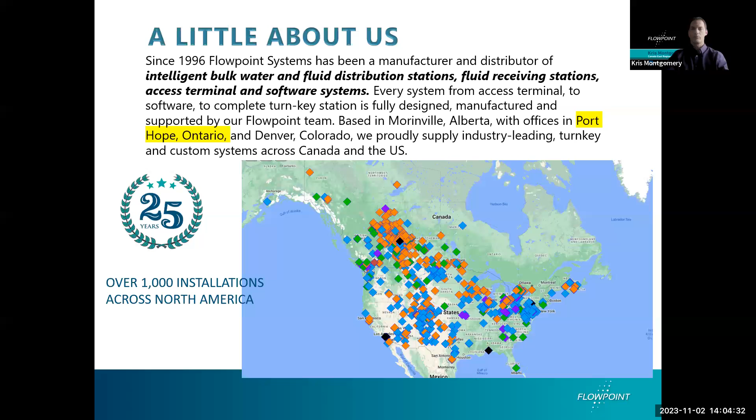So if you ever wanted to go out to a site to see a specific installation or a specific design site, there's lots in Ontario to choose from. Luckily, one of our clients has provided us a few shots. They actually do some presentations with us.

Here is their experience. First of all, why is anybody doing this still? Why are we utilizing hydrants? Why are we utilizing infrastructure that's not designed for the purpose that we're using it for? All we're ending up doing is causing damage to it when there's an easy solution to get exactly what you want and get it to your site.

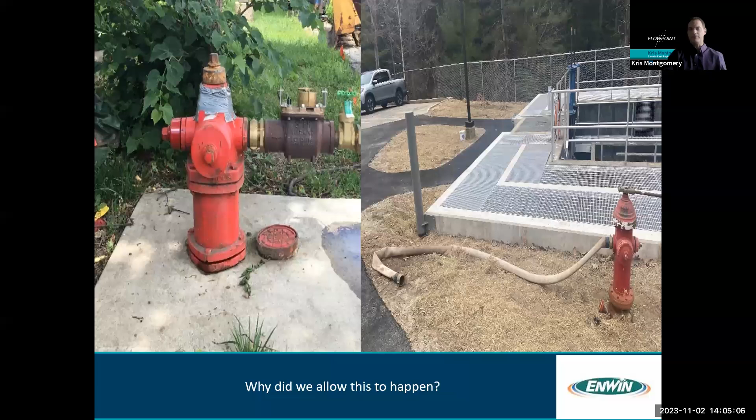So here's what they did. They switched over from that to a bulk water station that was specifically designed for their sites. They're in the process of getting three more in the next two years.

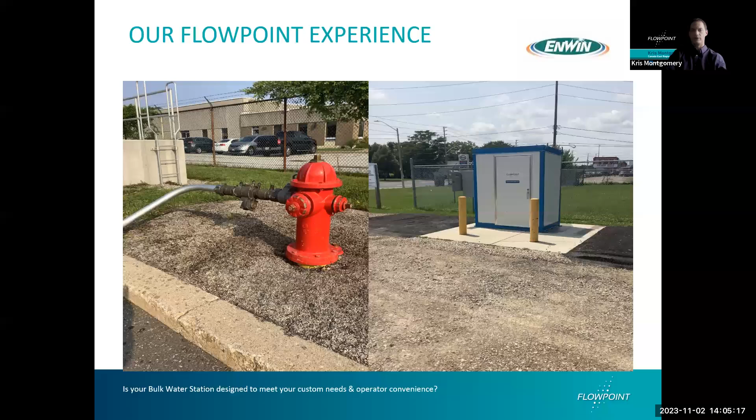Here was a big point they wanted to push out there to let people know about their experience, which was when they first planned an ETO type project, they had to use some estimates, some guessing, a lot of input from us, and their values came out to them thinking they would get a return on their investment in 4.5 years. They ended up getting that same return on investment, but in 13 months. So just to show you, there's a cost savings advantage as well when you're looking at an ETO approach in many situations.

So what is our process? The ETO process can be addressed with numerous different types of projects.

If you're looking for a water treatment process, you're looking for a package system. If you're looking for an addition to your existing system and don't want to build another brick and mortar building, or you need to do site prep like bringing in infrastructure to accommodate a building, you can save time by having the building built off site while all that site prep is being done. Then when the site prep is completed, the station is already there, ready to go. It just gets put on top and hooked up.

So you can be doing that for water treatment, for booster, for lift stations, even chemical feed systems. And what you'll find a lot of currently in Ontario, all the way from Carleton Place down to Windsor, are our bulk water stations and our septic receiving stations. I'm going to go into each one of those a little more as I continue on.

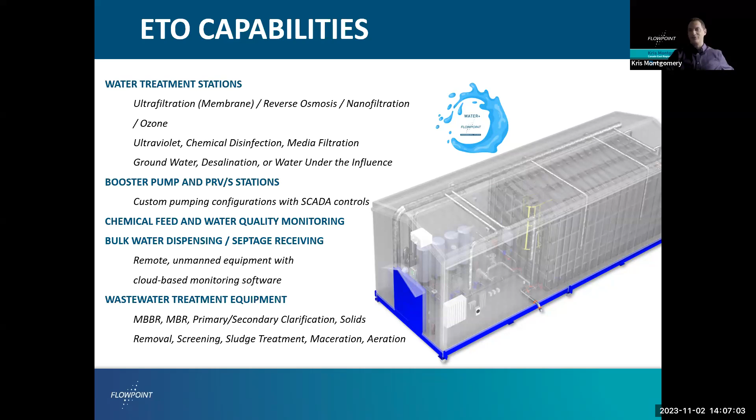So our process, we customize. That's the beauty. There's none of this 'we have 5 sitting in a storage site somewhere' approach, where when you call and say you'd like our package plant or our bulk water system, we say we'll ship it out tomorrow because that's all we provide. No, it's all the way from design.

It even starts with first learning about your site, and then working towards putting together a concept design, all the way through to shop drawings, to actual supply to site, to afterwards. So you get what you want, and you don't have to be limited to only what we can provide.

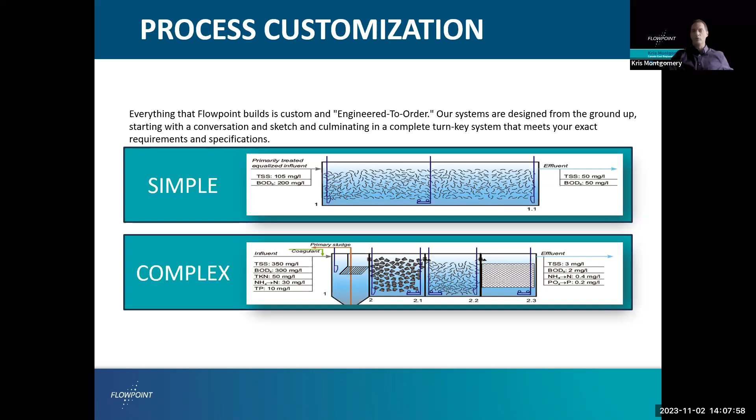So again, here's the process: discovery, asking questions. Then we go into the concept stage, and finally put together a package once we've clarified everything you want, everything you don't want, footprint, and all the different changes that might happen to a site to accommodate what you need and want. We build it, we ship it to you, and then of course it's installed on site.

And then Flowpoint offers support, service, and the software. We do it all. It's all being done by our company, not third party. So again, you have that one point of accountability for everything.

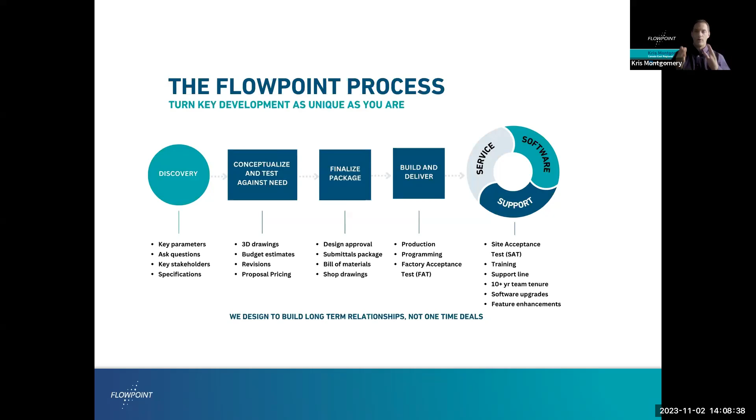So here's our first question, and remember there is a prize for a person at the end. Question 1: what benefit will you get from an ETO system that you may not get from a cookie cutter system? First, get exactly the equipment you want, get exactly the functionality you want, and get it sized for the footprint that you have. Number 2, having one warranty that covers everything, and the ability to have a company that provides you up to a 5-year warranty. Have only one point of accountability for your design, the manufacturing, the software, the service, everything done by one company. Or is the right answer all of the above?

Okay, well, most people got the answer of all the above. Not to say the other ones aren't correct, because those answers are correct as well, but the most correct answer for this is number 4. You get all of these things in an ETO system that you don't typically see in a cookie cutter system. In all my years in the industry, I can't remember someone offering me a 5-year warranty.

So here's what you'd see if you went to our website. You would see that we provide this same type of approach to all of our systems - bulk water, water treatment, booster, septage, custom systems. If you have something you want built and you think it'd be best to get it pre-built, pre-factory tested, shipped to your site, ready to go, give us a call. That's the whole beauty of us doing our in-house engineering, our in-house designing. We do a lot of one-off custom jobs as well.

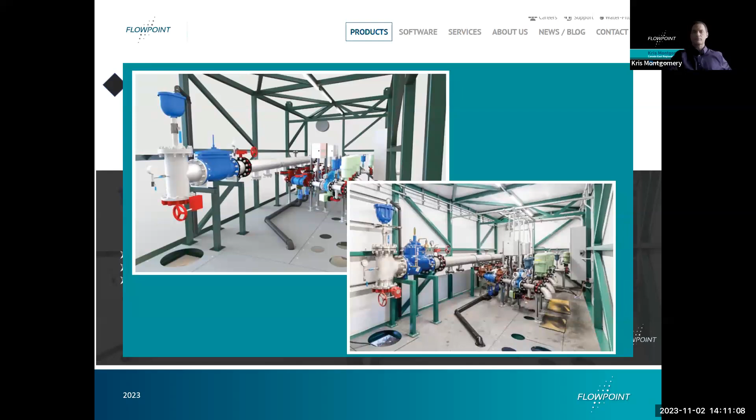So as we mentioned, there's the design work, design drawings, shop drawings, and these all get tailored and custom. This is an example of a dual station that's currently being used by the Durham region.

So where do we start? First off, we have our truck panels. These are our control systems, all built in our own factory, with software provided by us. It can be added and retrofitted.

That's one way we do work - we can retrofit to an existing building. It gives you that upgrade, and isn't that what we're all talking about? How do I take equipment I don't have and need, or take an older system and give it additional functionality through retrofit? That's where it starts. We can start simply with upgrading your controls and software, and then maybe in phase 2, down the road, we look at helping update the station itself.

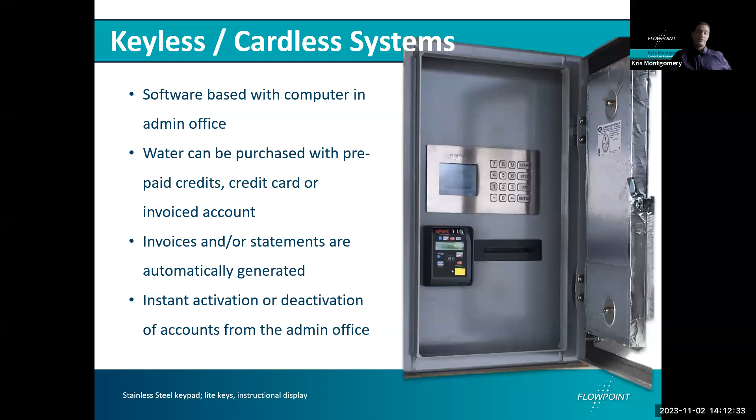Our panels have many options themselves. Again, engineered - keyless, cardless, no fobs, no keys. However, they can be provided if that's the preferred system. We can provide point of sale devices, printers. You can even still put money in if you want a money acceptor. I know a lot of our clients are going away from money and printers because everything's digital with our software.

So with that, as I mentioned, comes software. That helps you reduce administration costs. That's another way to engineer. The software is changeable - it's not 'here's our software, you've got to use it.' You might be looking at software being engineered as well.

We would like it to look like this. We would like this kind of control. We would like e-commerce, we would like prepaid versus having to chase people for billing. All of that can be configured. What do you want the screens at your station to say when a hauler first opens the door? All of that can be tailor-made. So again, from each step down - tailored, tailored, tailored.

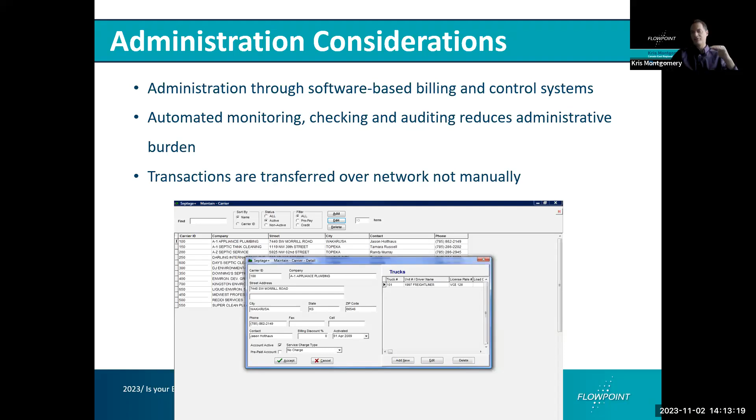Here's an example of what one of those screens could look like. Your reporting, your invoicing - again, customizable.

Design - interior will go through different designs. What infrastructure are you connecting to? And then, of course, this location might not be where you want it 5 years from now.

This might be near a new subdivision that's being built, so you want the haulers not traveling all through town. You want them getting water right there and being able to meter it, track it, and invoice for it or get paid for it. But 3 years from now, you can unhilty this, lift it up, and put it on a slab at a different site, if desired.

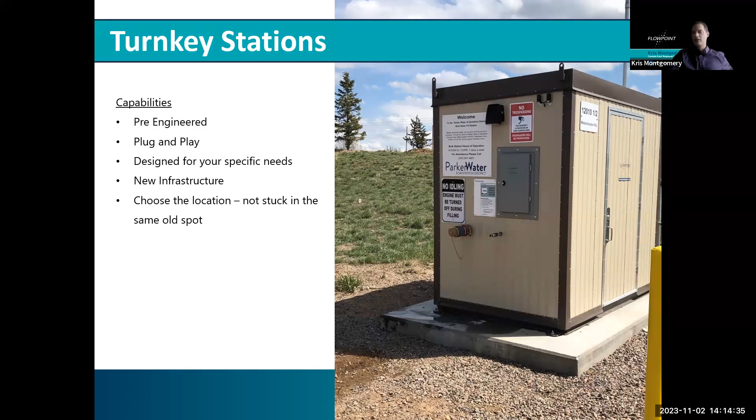So you can start with an honor system if that's what you have right now, and upgrade to this - that's what we're talking about. Getting something that operators can walk straight into. It's heated, it's got lighting inside. So when they're operating at 2 o'clock in the morning in the middle of February, they're not having to stand out in the wind, the cold, and the wet. They get to go in here and do their operations, do their maintenance.

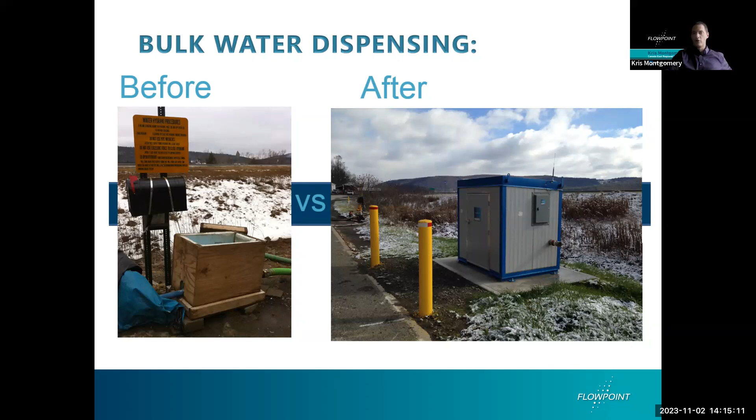And then they can lock it up when they leave, right? It's also got all those safety features, exterior lights, the whole bit.

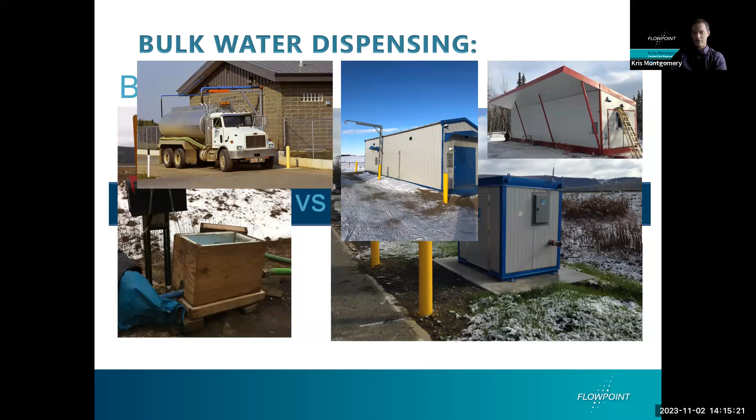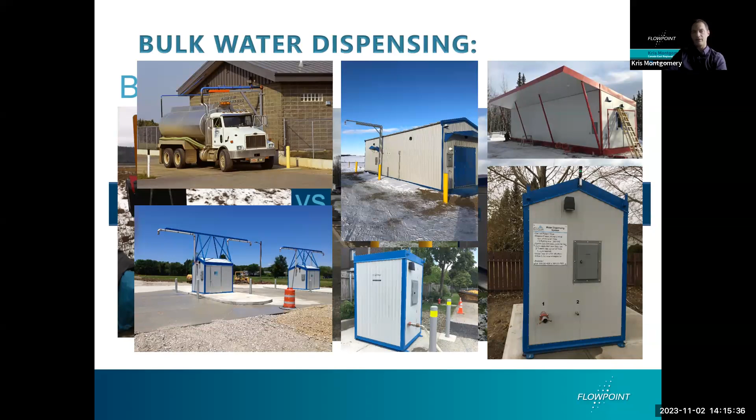Here's a few slides that just show you different customized systems. This is actually a station up in the Northwest Territories, so they're designed for our climate as well. We build in Canada, we design for Canada. Different sizes, different peaks of roof - that way, if you want more headspace or an overhead fill like this, there's lots of different options, lots of different designs.

We do have some standard components that we recommend - 3-inch stainless steel or 2-inch stainless steel, depending on the size of the system. We can do bigger pipe than that as well, with certain meters, but they all come with backflow prevention, and open and closing valves designed so you don't get water hammer in your station. Different types of communication - you can use Ethernet, cellular, or radio communication.

All these things are available, but we make sure there's communication, we make sure there's backflow prevention, we make sure there's metering. We make sure all these controls are in place for your bulk water supply.

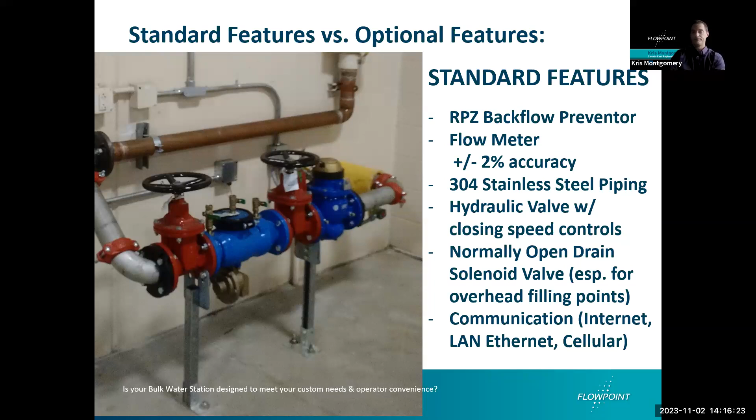Designing again, rate of flow. How fast do you want these trucks to be able to fill? How quickly, how much demand do you have? Do you have need for multiple trucks to fill at the exact same time simultaneously? All these things are considered.

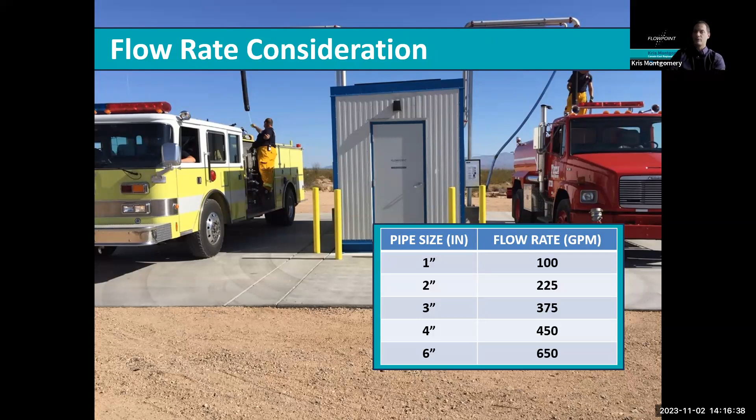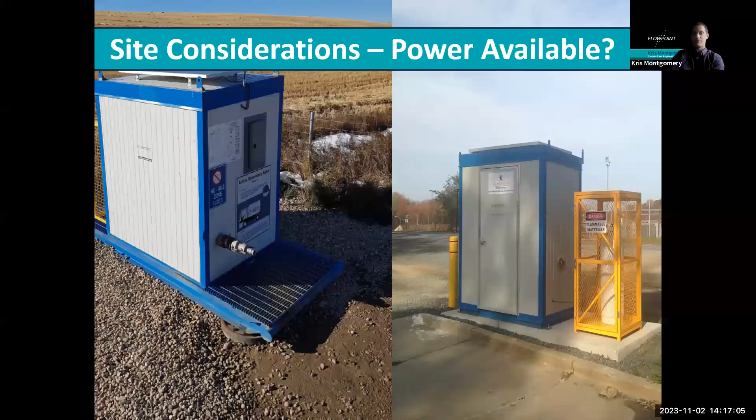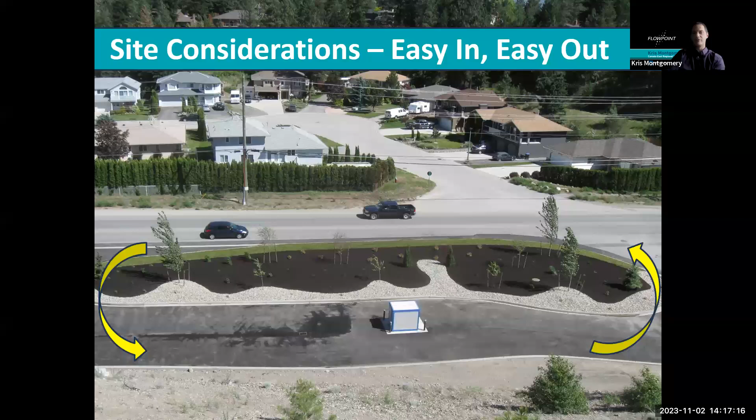Portable response, having it trailer mounted. What does your site look like? We will work with you depending on how that site configuration is to make sure we're providing you the right station for that site layout.

We can do PLC communication or SCADA integration. We are integrators as well. That's not just for our panels, that's not just for our small stations. We also have our MBBR systems.

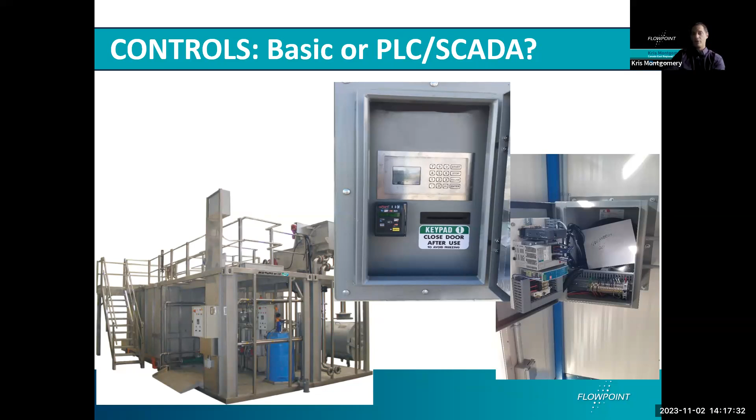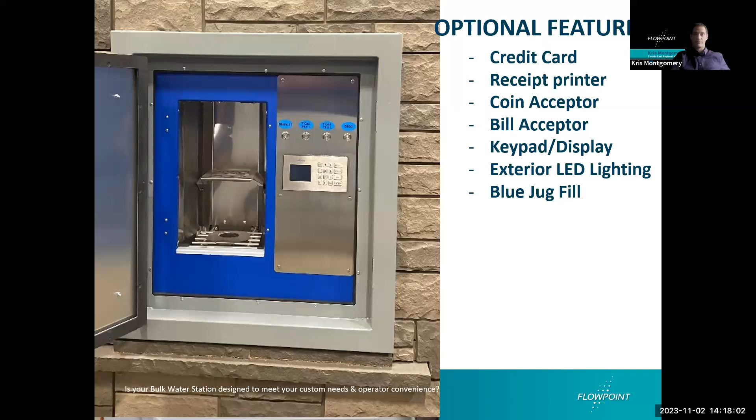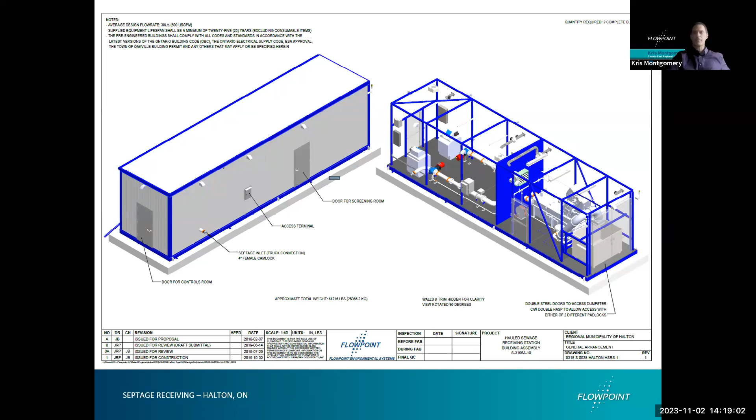Do we have parts that we recommend? Absolutely. But we usually recommend not just this is the equipment that we find works best, it's this is the equipment we find works best with the conditions you've identified for us. Specific to your site, specific to your needs.

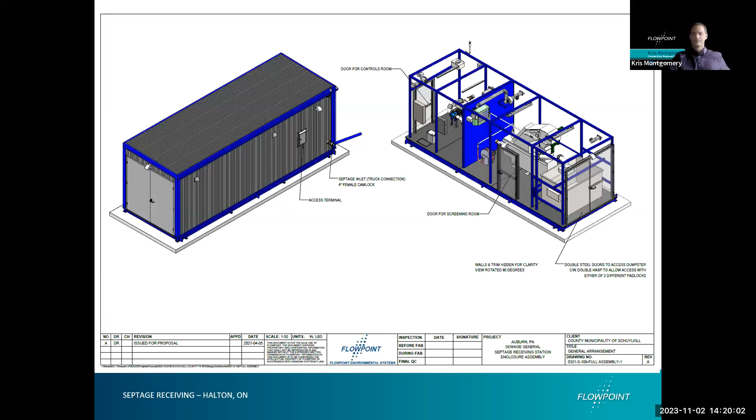So now we're ready for question number 2. What aspect of an engineered to order bulk water system, septage receiving system, or pump station cannot be customized? So again, what part cannot be customized?

That the client and/or the consultant can be involved in every stage of the project from discovery to project completion. That the software functionality, software agreements, and software service levels can be customized. The supplied equipment, the features, and the station configuration, can it be customized?

Ability to be upgraded and added onto in the future, that determine the scope of the performance service contract after the station is commissioned. So yes, can the contract and the service and support after you receive your station, can that be customized? Or the last possible answer: now, this is a bad question, as all aspects can be customized.

And here we are. So just so we can add some clarification, because again, some of the points in here I didn't actually review earlier on the presentation, it's an opportunity to bring forward some questions as well.

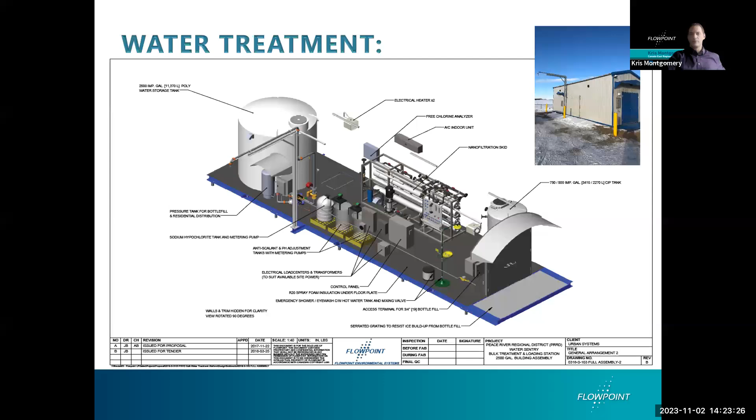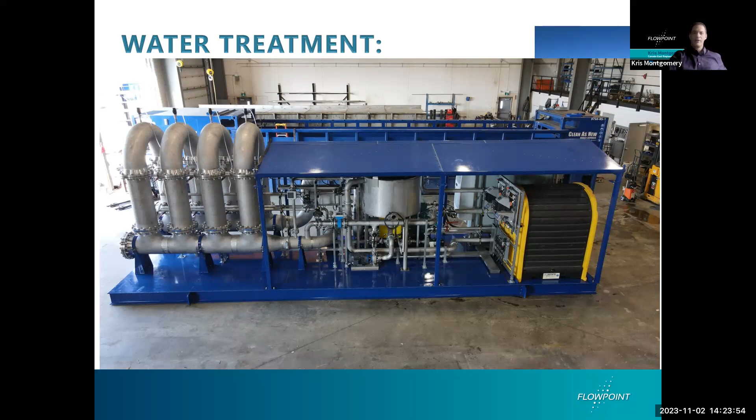All right, the majority of people got it correct, that when you get a turnkey supplied system, you don't have to overcome limitations because it's been designed and built specifically to your needs for specifically what you wanted, and you had input along every part of that chain of conversation. So what you're getting is exactly what was designed for what you wanted it to achieve. So there's no limitations to have to overcome.

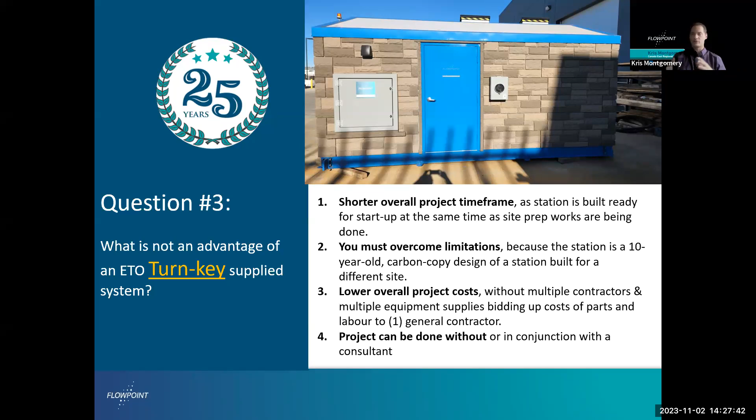So MBBR, moving bed biofilm reactor. This is a treatment system that we provide as a package system. It's engineered to order. We look at the size, we look at what you want to treat, and we look at all the factors that are involved, and then we're able to provide this advanced technology.

This has lots and lots of advantages over some of the other treatment processes, specifically when we're looking at certain size models. It has a very small footprint, which is helpful if you have an existing plant without a lot of expansion room due to being landlocked. And if you're looking for a new greenfield site, these can be put underground with no odor coming from them, which is an advantage you can't get with a lot of other treatment processes.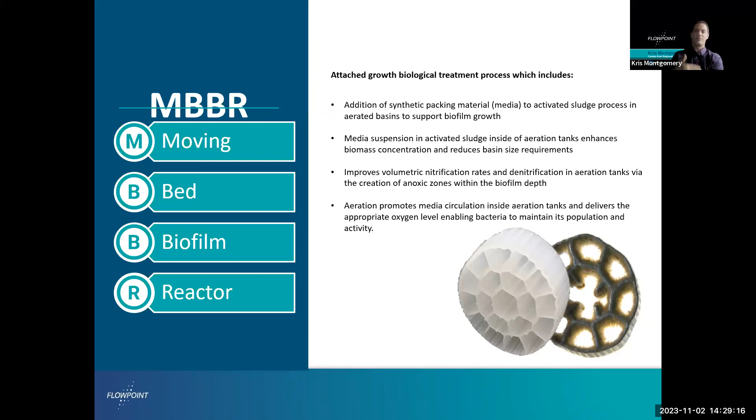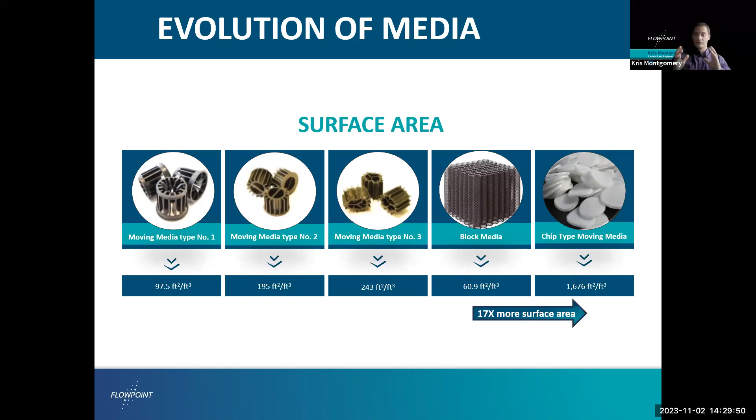There are different medias that can be used. The different medias provide different amounts of surface area, and more surface area gives us a lot of different advantages. We can tailor the right media for your application. In our situation, as you can see going down the line, we have our chip type, which provides the best surface area, so you get a lot more treatment in a much smaller space. That is the evolution of the media.

It's a simple process. These are complex systems in terms of doing full treatment versus just distributing bulk water, but the process is still the same. We look at the process flow design, the needs of the site, the site footprint that's available, production of schematics and drawings, discussions, production, supply, install, ready to roll.

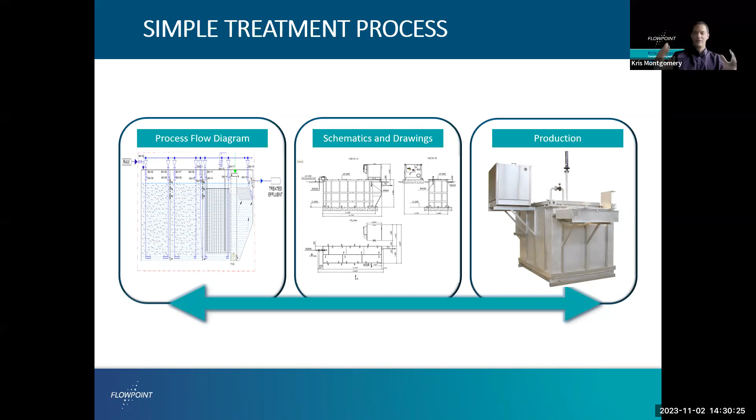Can these be provided different ways? Absolutely. They can be outdoor, but inside the ground, as I mentioned, so that once the earth is brought back in and covered up, all you're going to see is that top plate.

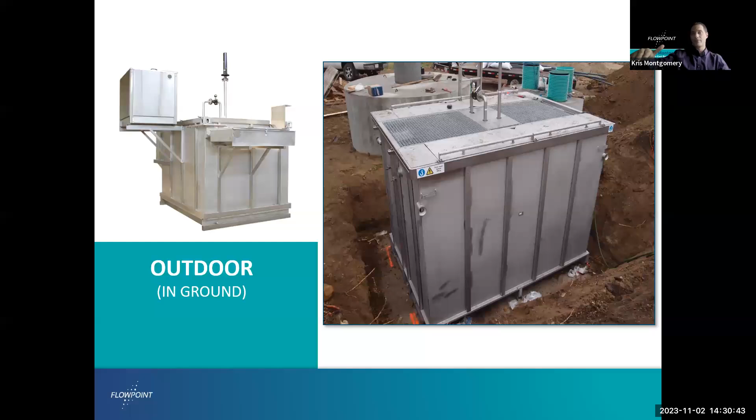So above ground, indoor. Again, more access to the building, more access to the equipment, depending on the complexity of the system and the size of the system. Modularly, you can have up to 8 of these put together, so again, expandability.

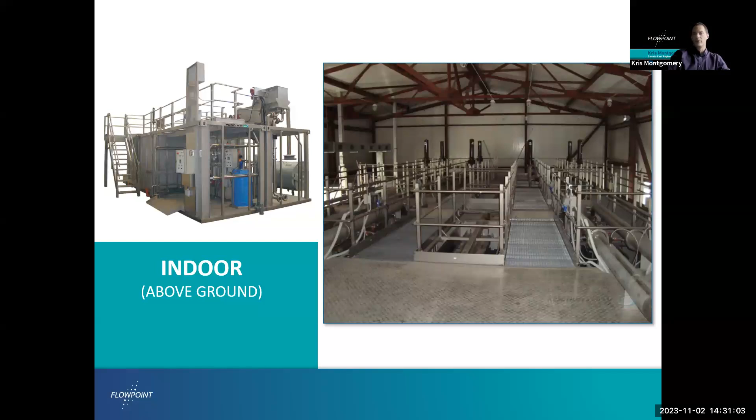Outdoor. And here are our advantages, the competitive advantages of MBBR treatment process that's engineered to order.

They're robust. These treatment processes are not new technology, they're very current, advanced technology, but they've stood up. We know what to expect from these systems because they've been around for a number of years, and they're already working and providing us data that shows how well these systems work. They go in a small footprint, very quiet, and no odor.

This turnkey solution gives us those same advantages I mentioned earlier, where a site can be being built. You might be putting it in ground, so while they're removing the earth and bringing in piping that's going to be used, the station can be being built at the same time, so that when all that work is done, the station is just sitting there ready to be put in the ground, hooked up, and ready to roll, versus doing all that work and then starting construction.

One key thing brought to my attention, because I love understanding things from the perspective of the operators who take care of these systems every day, is that these treatment processes have a low requirement, meaning your license levels. You're looking at operators with level 2 licenses as usually the highest level required to operate one of these systems. There's a lot of advantages to that, plus operators can get a lot of sophisticated training by learning how to run these MBBR plants. There's very low maintenance requirements on them, and they're completely customizable.

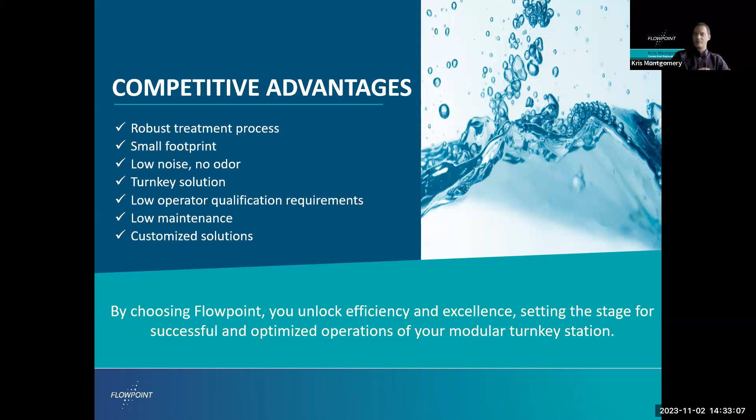So, question 4. What is the most important statement of these 4 statements? Statement 1: The MBBR treatment system is proven technology that can be custom engineered, supplied as a turnkey station, produces no odor, and offers both capital and operating cost savings.

That's our first option. Number 2: an engineered-to-order bulk water system station has a return on investment that results in the station paying for itself, and it generates significant profits during its useful life.

Or maybe this statement's more important: Septic receiving stations can be located at your wastewater treatment plant or off-site. By having it off-site, that allows for the wastewater to be diluted as it travels through the collection system. It then also reduces truck traffic at the plant, provides for 24/7 service to the community, and even more advantages than that. Or is this statement more important?

The Toronto Maple Leafs will win the Stanley Cup this year.

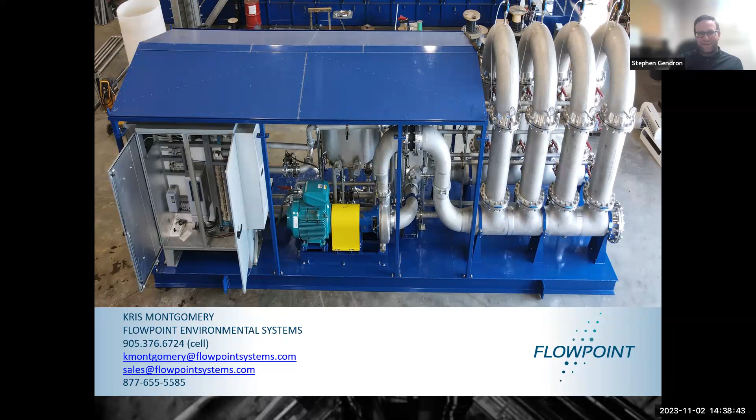Terrific, thank you. The next question is related: what climate conditions is it made for? Again it doesn't specify which item, but I'm guessing from your answers that it applies to most of the climate conditions we experience here in Canada. But if you want to expound on that a little bit.

Sure, all the systems that we actually manufacture are to be used in Canada. So everywhere from Fort McMurray, Tuktoyaktuk, down to Ontario, right? So everything's freeze protected, heat traced if necessary, and climate controlled if it's actually a building.

Yes, and for the building-enclosed MBBR station, there's been situations where it's been designed and rated for negative 50 degrees Celsius. I like to stay conservative when talking about our stations - our bulk water and septic receiving stations supplied throughout Ontario are rated for minus 40 degrees Celsius. That's the custom-made, insulated panels alone, and then we add heaters and other aspects. So yes, have we built for Canada? Absolutely.

Terrific, thanks for your answers.

So the next question is, what kind of facility and operator classification does the MBBR process fall under? It's a Class 2 - I think that's what you called it in Ontario, Kris, correct? Yeah, that's Class 2 for Ontario, which is probably where the interest comes from here. That's correct, yes.